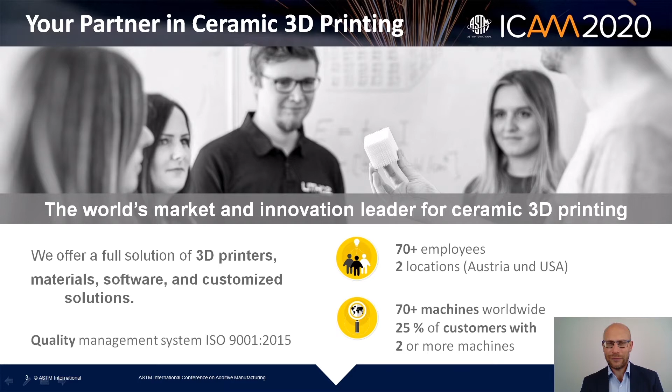So we see we have a broad basis of installed machines, and we already have a lot of experience. We are nearly 10 years old and we have built up a huge experience in the field of ceramics additive manufacturing.

Before we come into the research topic, I think it's also important to first understand a little bit the technology, what we are doing, how we are doing it, and then what is currently the state of the art. This is important to understand what we have already reached and what can be done with this technology. For those familiar with ceramics, this is nothing new.

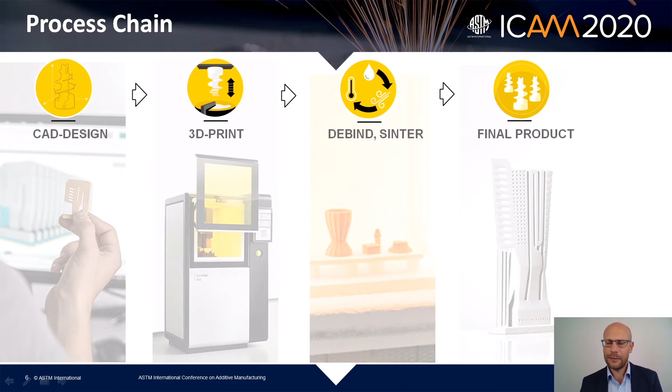Ceramic forming is a 2-stage process: it starts with the forming, then the debinding and sintering. For those more familiar with 3D printing than ceramics, we have to add another step, the debinding and sintering step. So we work at room temperature and then have to transfer the part into the furnace to debind it and sinter it, finally achieving the required mechanical properties.

Our technology works with light, based on a lithography approach, using DLP as a structuring method. We expose from underneath, so where the light hits, the material solidifies afterwards, and the part is built upside down.

This approach has a lot of advantages. First, it's easy to use at industrial scale because you don't need so much inventory in terms of slurry, so you can work with very little slurry, and you can make much more precise parts because there's no plate-part contact. We have a lot of knowledge on different approaches, all in-house in our labs, but we think DLP in combination with exposure from the bottom is the easiest way to industrialize this technology.

I don't want to go into more detail now. If you need more information, you can find a lot on our website or on YouTube, including videos showing how this technology works.

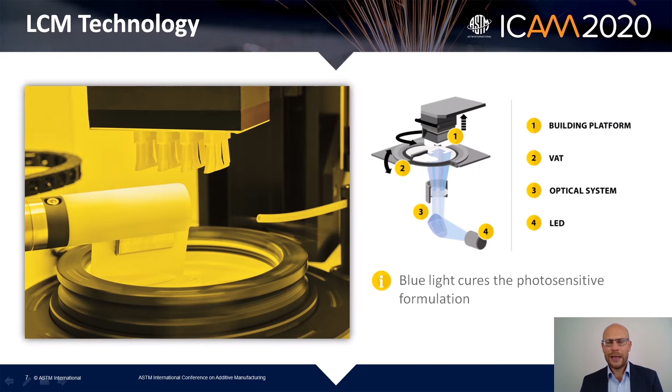But after this, as I said, is just the 3D printing. It will be transferred into the furnace where we have the debinding, meaning the UV curable binder is burnt off, and then the sintering, where the parts shrink together and achieve the resulting mechanical properties.

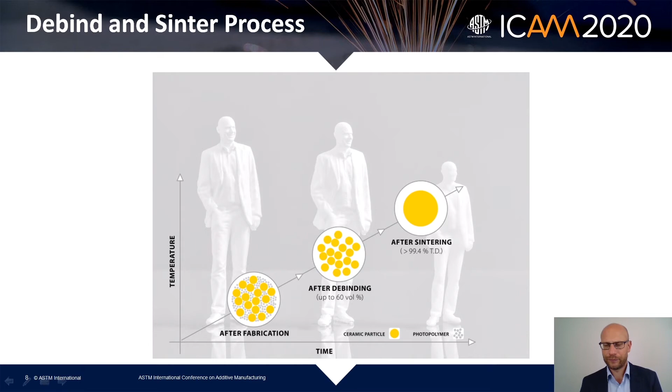This is the resulting densities and strength. This is nothing special for the 3D printing approach—this is basically what every ceramic part has to go through, so ceramicists are well aware of this technology. But what is now possible? What can already be done?

There are a lot of different materials already available. As you can see here, alumina, zirconia, but also porcelain, glass ceramics, as well as bone replacement material like tricalcium phosphate, hydroxyapatite, bioglass, as well as more difficult materials like silicon nitride or refractory materials, magnesia, cordierite, as well as piezoceramics, and as a special material, regolith, which is actually moon dust, which we've worked on together with the European Space Agency.

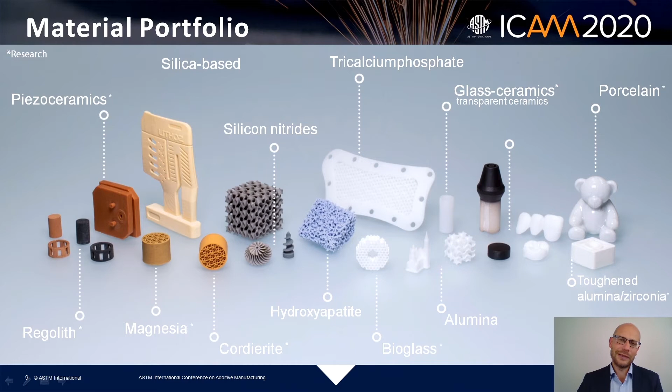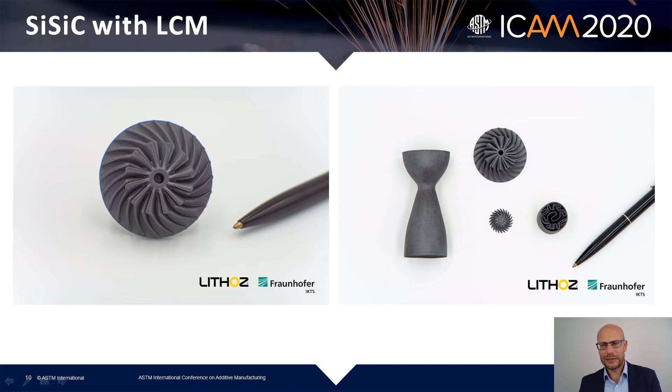Basically, what we can do is use every powder as it's used in conventional forming technologies, since it's processed the same way as in conventional forming.

So it's something where we can say the state of the art is that we can achieve the same, or at least very similar, properties as in conventional forming.

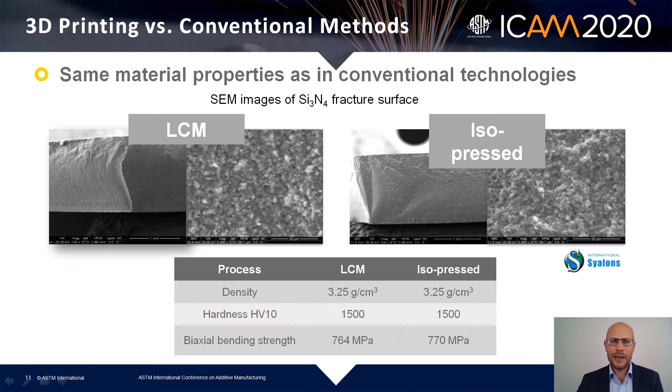All the parts you've seen here so far have not been polished or grinded. So this is the normal way of what we can achieve with our technology.

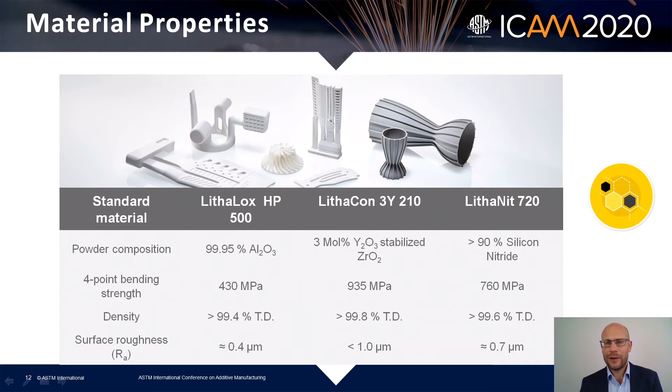I think also what's very important to show the quality of additive manufacturing is if you can make alumina translucent. This means that if something is translucent, there can be no pores included, there can be no cracks—everything needs to be perfect, and this is what we could show.

I call this the Champions League of ceramic processing. If you can make transparent or translucent alumina, you can really show that your process is working and that everything is in a good way.

For those who are already aware of these kinds of developments, you see that this is really the leading edge here in ceramic additive manufacturing.

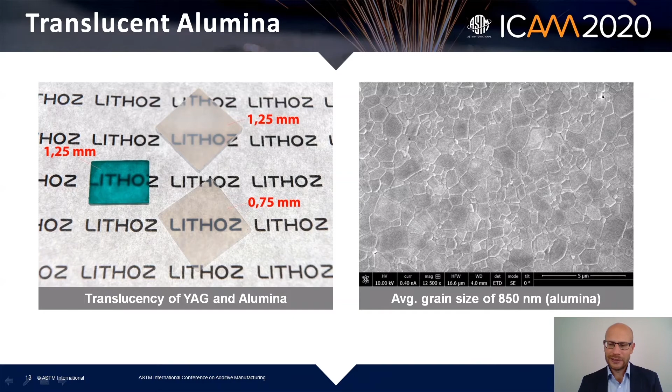We can achieve really tight tolerances, and we see this technology already in industry, in serial production, where you have to fulfill all those requirements—especially reproducibility and tolerances, which are a very big topic there.

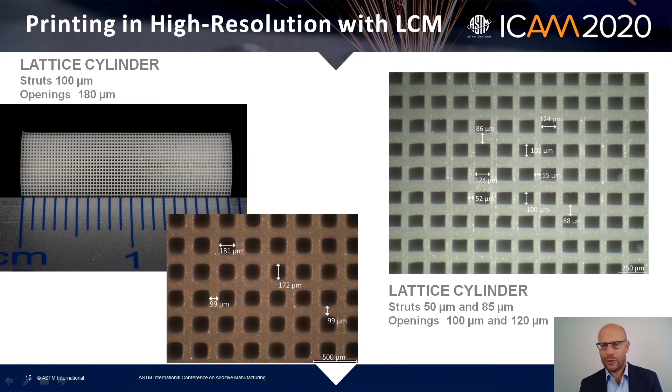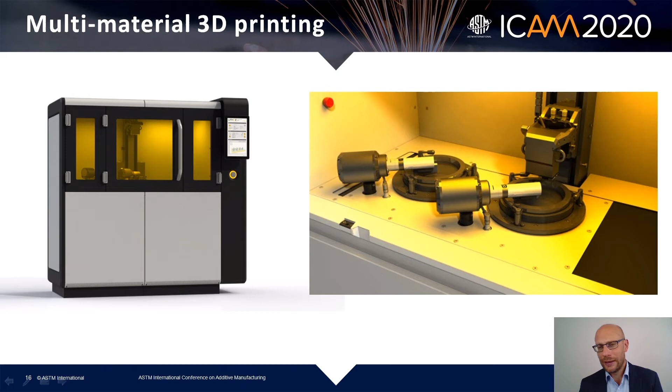Something we have lately been working on which is also very interesting is multi-material 3D printing. Here you see our CeraFab Multi 2M30, where you have two beds with a cleaning station in between, where you can really print two materials in different layers or even in the same layer. For example, here you see on the left hand side zirconia and alumina combined.

So 'Lithoz' is written in zirconia in the same layers as in alumina. You can also see on the very right hand side and down below that you can print the same two different materials in the same layer.

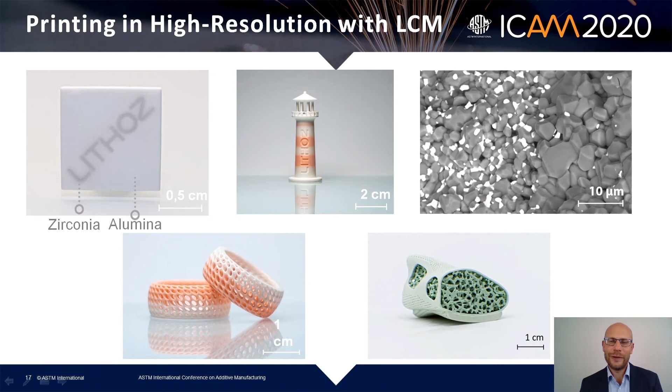And the contamination, I think this is the key element here, is already under control. We can really make sure that there is no cross-contamination from one material to the next. I think this is a very cool application, this multi-material approach. You will see a lot more in the future here—a lot of things are coming up, and I'm really looking forward to working in this new field with this multi-material approach.

Now let me talk a little bit about the mechanical characterization of alumina. Why is it important, and how do we characterize it? I think we have done a very nice study together with the Montanuniversität in Leoben, where we did very clear research on how to test and what to test.

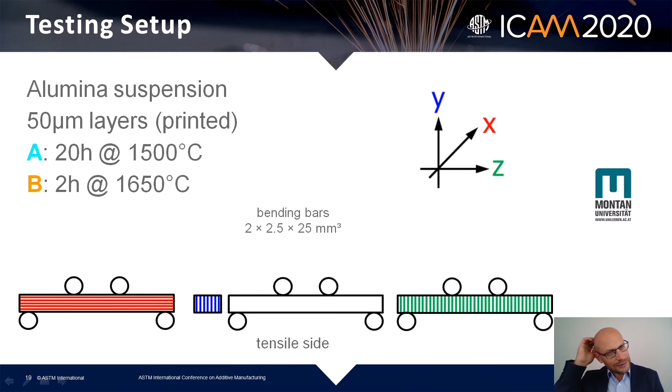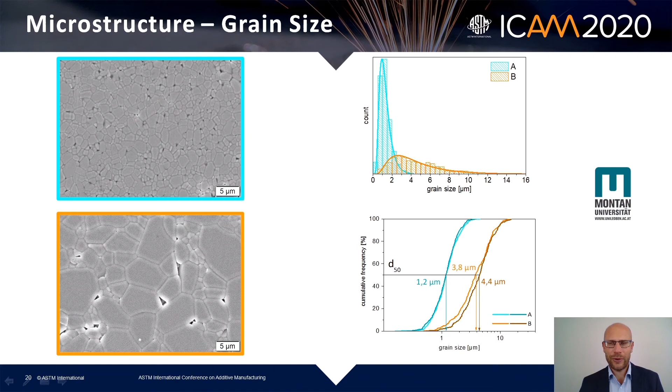But there's also a different density, of course—we achieved 96% density and 98% density respectively.

And what you can see here—I think this is the big issue with additive manufacturing—is that when you are not yet dense, you can still see the layer structure. It's still visible, because with every technology there's a certain inhomogeneity at the layer borders, a higher pore concentration there. If you do not sinter to full density, you still have this information left that the part is built up of layers. As you can see in the upper picture, the layered structure is clearly visible, whereas in the picture below, where we have 98% density, the pores are completely homogeneously distributed, and you cannot tell that this part was made by additive manufacturing—which is exactly what you want to achieve.

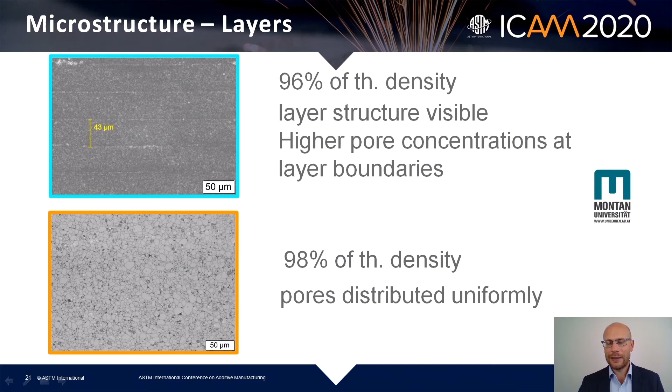So now we look at the mechanical properties, namely the strength. First of all, what you can see here is that the A material, which actually has a lower density, has a higher strength compared to the B material.

The huge difference here—sorry, what I forgot to mention is that both were machined, as a standard testing method, chamfered and then tested. So we see the A material, which actually has a lower density, has a higher strength, which is due to the smaller grain sizes.

But what we can see here, from the Weibull picture on the left hand side, is that there is a clear difference between Z and the other two axes in the A sample, whereas we don't see a significant difference in the B sample. Also, as you can see from the Weibull modulus, in the B sample the Weibull modulus is much higher than in the A sample.

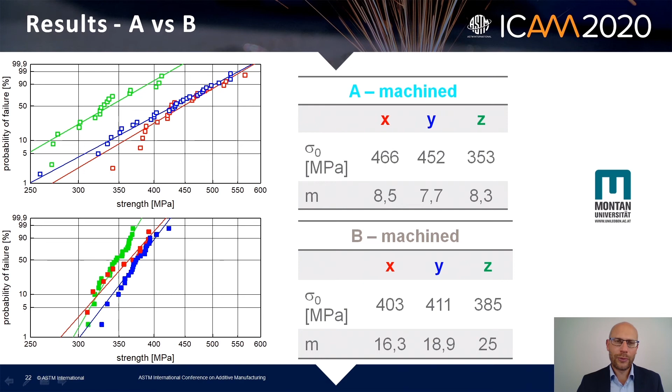If we compare now machined and as-printed, you already know the machined values. If we measure them as-printed, you can see that there is, at least from the Weibull statistics, a significant difference in the as-printed value. But the difference is still not too big. The Weibull modulus is getting a little bit lower, but the values are still comparable and within the distributed strength, so there is not such a big impact on the machining.

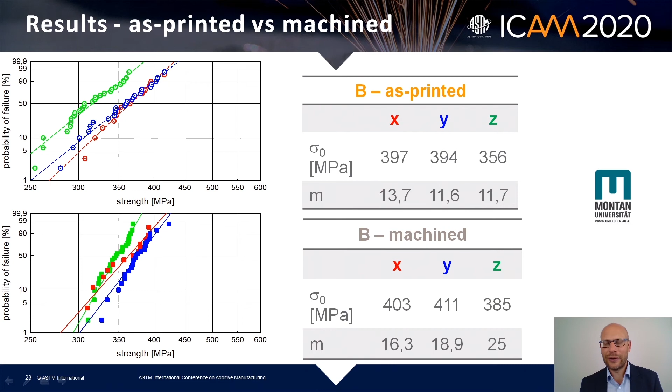But you can see that at least in Z there is a difference. Why is this? This is very clear because in XY we have layer-wise printing. We see that there are layers, and these layers act as a tension tip, a tension concentrator, and we see that we have higher stresses there, and this decreases a little bit the strength of the material.

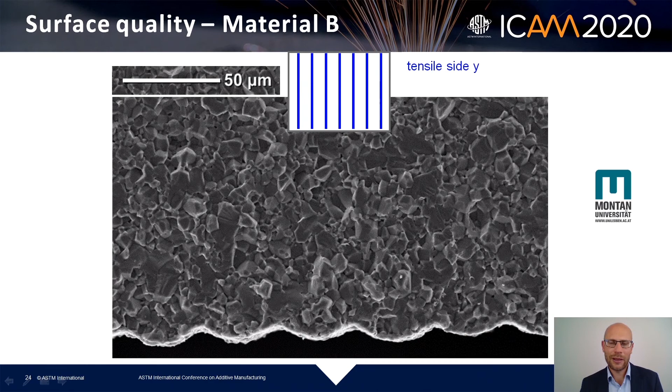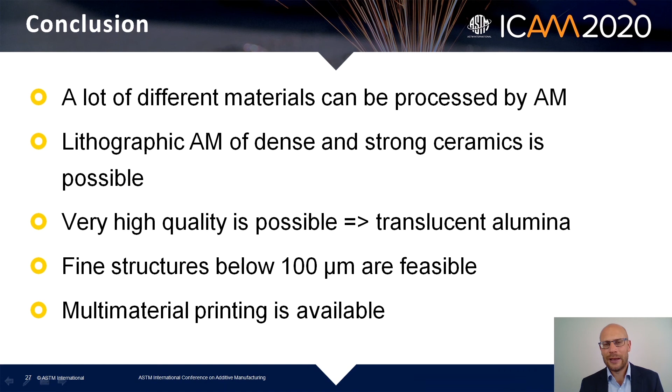To conclude, what is the outlook and what can we recommend? First of all, basically nearly every ceramic material can be processed via additive manufacturing, although not every material is yet available, but a lot of different materials are. The LCM technology is clearly a technology which can produce strong and dense ceramics, and very high quality is also possible, so we can make translucent alumina. Also fine structures can be produced well below 100 microns, and last but not least, multi-material printing is available.

So our recommendation, which we are trying to educate the market about, is how it can be tested. First of all, we prefer 4-point bending over 3-point bending, because it gives you a bigger volume which can be tested. And this is definitely a must: test all parts in upright position, so that you are testing the layer adhesion, usually the Z-axis. So you build the part like this, and then you test it like this, and you really test the layer adhesion.

We strongly prefer that the test should be done machined, this is possible, but also, and this is very important, it should be done as-printed, because if you have the actual part, you will not be able to machine it everywhere and test it. You will have a multi-axial tension and then you have the as-printed quality on your part. So we strongly recommend doing as-printed testing to get the real values, and as we have seen, the difference is not so big. So as-printed is a method which should be taken very much into consideration, and should also come, in our opinion, into a standard.